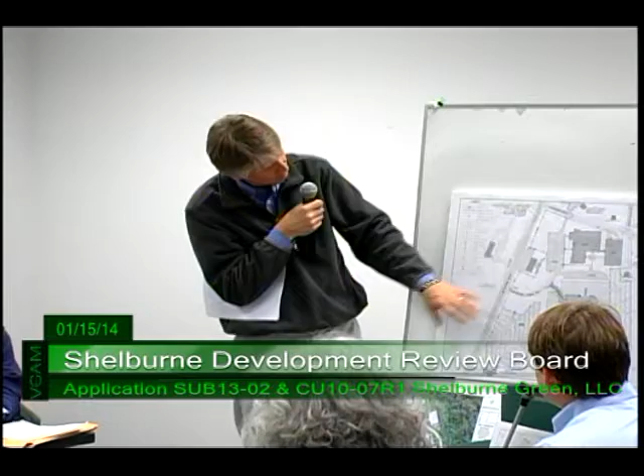This proposed project occupies the southern portion of the remaining undeveloped portions of the property. This plan identifies the open space components that encircle the proposed development area. Currently, there's an existing driveway that services the site and is intended to provide the primary means of access for this new project, part of the newly widened portion of Route 7 in front of the Shelburne Vineyard and the Folino's and Fiddlehead building.

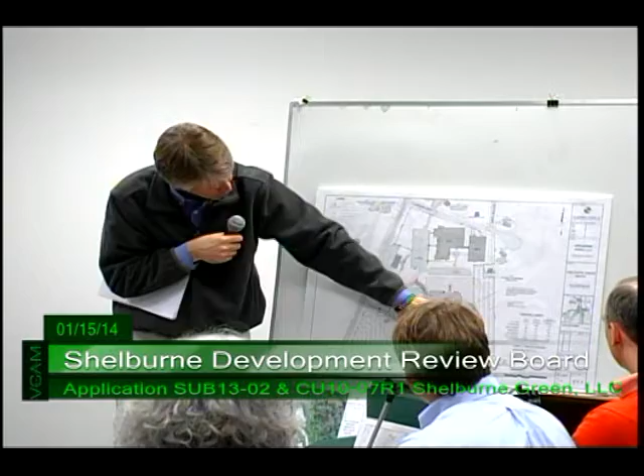That being the surrounding area, this project proposes a master plan approach with a number of relatively small sized commercial buildings as a means of breaking up what otherwise would be the mass of a large structure. The intent is to create incubator space for small businesses, and the underlying plan of how that would play out is shown here on this site plan.

This zooms in on the southern half of the property, showing the existing access drive, existing parking, and the existing structure. As you move south, there would be a U-shaped type of access supporting the parking and a turnaround allowing circulation in and back out, with a series of small buildings working around the horseshoe shape in support of the project's goals.

As far as setbacks, this is proposed as a planned unit development, which means it's obligated to provide at a bare minimum 100 feet of green space around the perimeter, and whenever a project abuts a residential use, that gets boosted up to 150 feet.

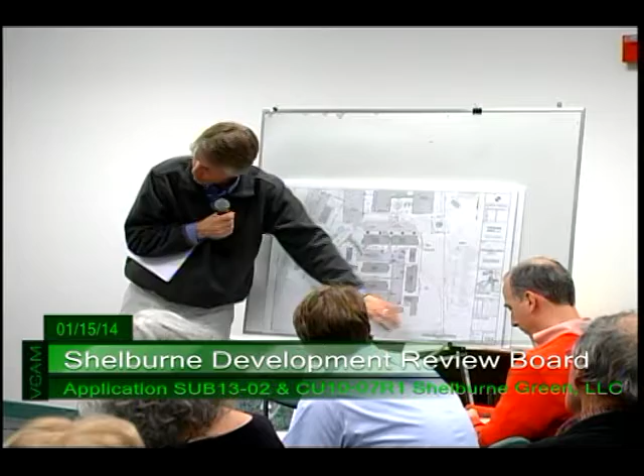So out of that, there had been previous discussions with the Gables regarding supplementing this particular portion of the field with new landscaping that has been in place. During the sketch plan hearing, there was some discussion about pedestrian access through this particular corner of the property, and since then the fence has been extended to try to seal off this area, at least what is controlled by the applicant.

But in regards to this particular preliminary plat application, I must apologize.

We've basically added flesh to the bone regarding the detailing of the utilities and the site grading, and with that have also identified in more detail the presence of a Class 2 wetland that occupies the southwesterly corner of the site. That has been site-walked with the State of Vermont Wetland Division, and an application will be required to be submitted to them in support of the activities that fall within the 50-foot buffer.

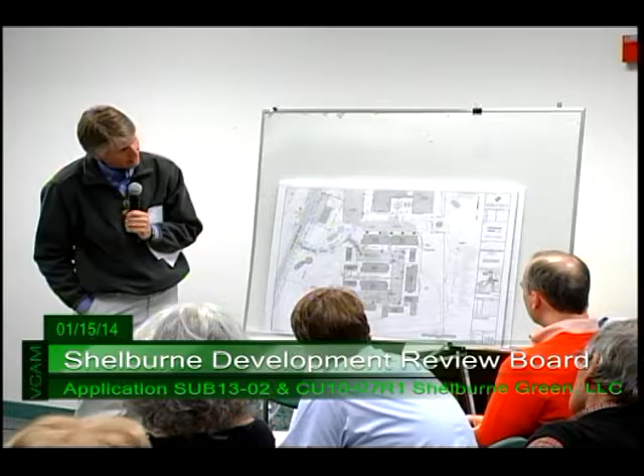Otherwise, we have received water and sewer allocation from the town to support the project, and we have met with a number of department heads. The water department unfortunately had some water main breaks that precluded them from being able to prepare their staff report, but nonetheless there are a couple of small recommendations that they've made that we are very happy to implement into the design plan.

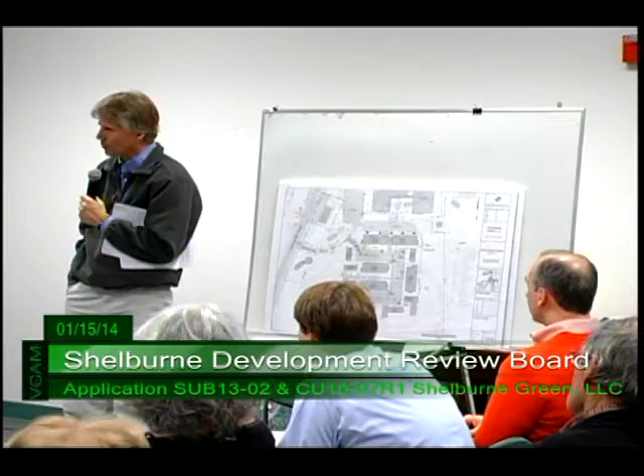So I guess at this point, perhaps we should spend a little bit of time. Now I'll let Graham Goldsmith come up and talk a little bit about the concepts for the buildings, and out of all that, start to round out the ideas for the landscaping. Then we can go back into the staff report and discuss those particular items which have been identified as worthy of additional discussion to help bring some closure on those issues.

Thank you. Graham Goldsmith Jr., one of the developers of this project. Just wanted to tell you a little bit more about our thoughts here. We've enjoyed a lot of success with the initial phase of the project here. We've had some really great tenants move in, some interesting companies, and a great mix of people in there.

What we were trying to do at one point was to create some incubator space for smaller companies to come in. We were talking with a lot of food producers and smaller kind of agricultural value-added products, but also other types of products. So in keeping with that, we really felt the southern portion of the property, as Dave said, was a great location.

We felt there were kind of some big monoliths with the Teddy Bear Factory - they're a great big warehouse - and our building is a larger structure as well. So the idea was to break up that kind of series of buildings into smaller buildings.

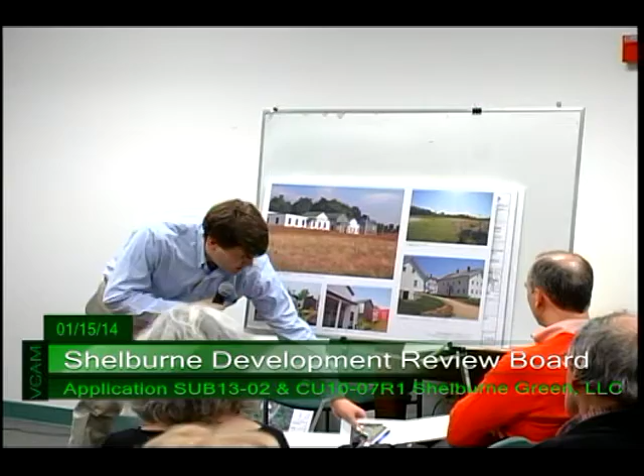But really the idea with the site plan is we've got all of the services and the parking in the middle of the development, so really the parking and cars won't be very visible from the road - you'd really just see the buildings. We're looking at doing gravel driveways and parking as well to reduce the impervious surfaces.

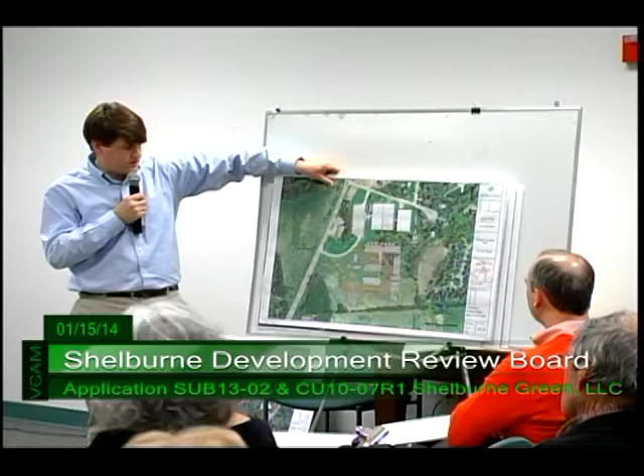The idea with this too is to try to find a way to build these at a reasonable price so that we can have some lower rents, to have some newer companies come in as well. It would be open to office users as well.

For the conditional use, what we're looking for is really just what we have here in the building already. It would include enclosed light manufacturing and warehousing, which is consistent with the neighborhood - you have the Teddy Bear Factory that does that. This building, we've had essentially that use since the 1960s, but office has been a great addition.

So an aggregate of 70,000 feet in total. The buildings range from about 9,000 feet to 2,200.

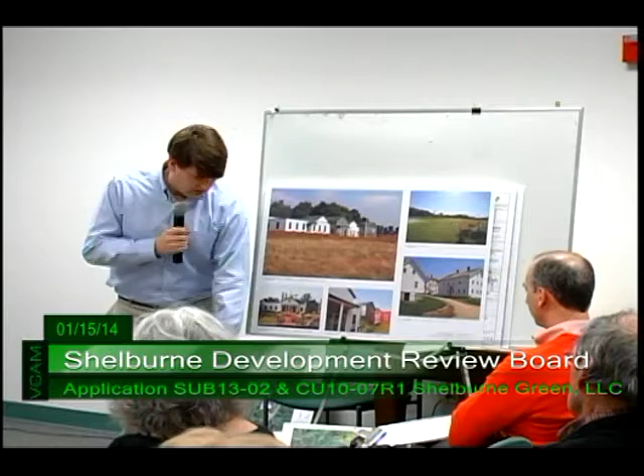What's the aggregate square footage you're adding again? 70,000 feet in total. I think we have proposed 151 parking spaces. And really also we were the ones that did the lane widening on Route 7. So a lot of that infrastructure we invested in there was keeping in mind that we might want to do something down the road in the southern portion of the property.

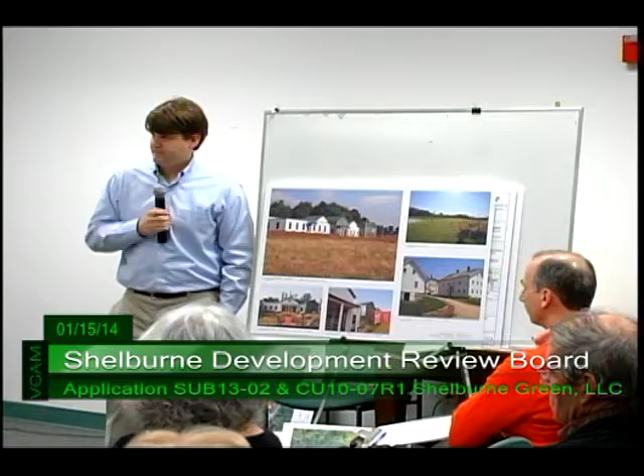Since it's gonna be gravel parking and driveways, what kind of curbing are you gonna use to keep the gravel where it's supposed to stay? I don't think any curbing at this point. Anything to mark the actual parking spaces? So there won't be striping, obviously. No striping, just at this point. Okay, so just gravel and park where it's logical. That's what we're thinking for now.

Could you just give me a rough idea how this has changed? Any of the changes you've made since we last saw this? Have you changed anything with features like?

Dave Marshall: The primary change is a tip of the hat in regards to the formal delineation of the wetlands. We found that those were larger than what had originally been anticipated, so we consolidated the structures in the southwest corner of the project site. Otherwise, as Andy indicated, it is very similar to the sketch plan application that had been submitted previously.

Dave, the Natural Resources Committee raised some concerns about open space, which I'll think of as a congregation space maybe for employees, if you incorporate anything like that. They also mentioned whether we've done a good job of landscaping for the visibility coming up Route 7 and seeing this project. And impervious surfaces - is there anything that will prohibit you from paving a lot of this parking area down the road? Because if you were to pave that in the future, it is an awful lot of impervious surface.

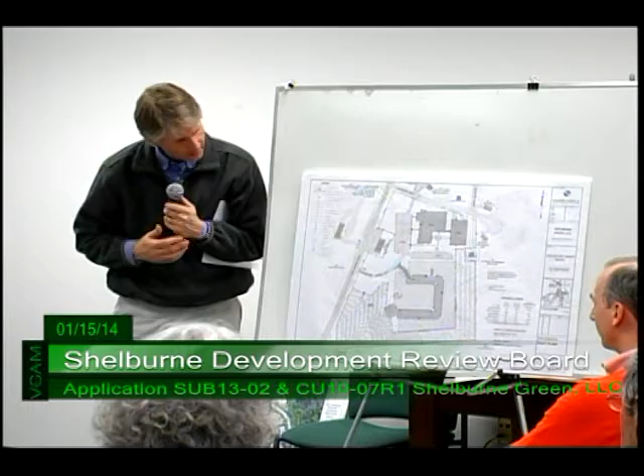And very quickly in regards to landscaping, as far as vehicles approaching Shelburne, coming from the south heading north, one thing that's very nice about the project site is that there is a ledge outcrop right in this corner, and it basically provides a mature growth of vegetation. The farmer never got in there to hay that area, and it's grown up pretty significantly, creating a very nice visual screening as you're moving north in regards to what is happening in this particular corner of the site. Under the previous project, there were trees planted along Shelburne Greenway. They are small at this point, but they will grow in time, at least that's what we're told. So in regards to creating a character and an access focus point, those have been the goals so far in regards to landscaping, but more importantly, preserving that particular area as part of that gateway preservation component.

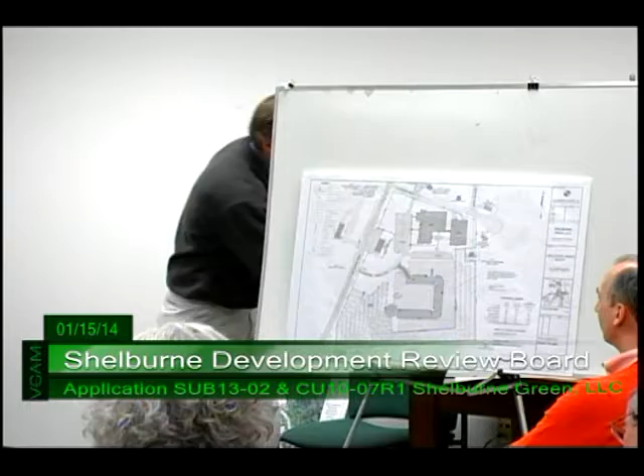Have you thought about an employee congregation area, like picnic tables somewhere, or anything that could satisfy that? Yeah, we have a couple different areas. As part of the original project, we have a great outdoor area - in the warmer months we've got a nice water feature with a little waterfall right here. We have lots of tables and chairs, and picnic tables over in this area. One thing we like a lot and we're going to try to preserve as much as we can - we've got a great grove of maple trees here, and there's a really great tree in there too that maybe we could add some benches to. We also have a walking path that goes around the perimeter of the property, so at lunchtime some people like to walk around the perimeter.

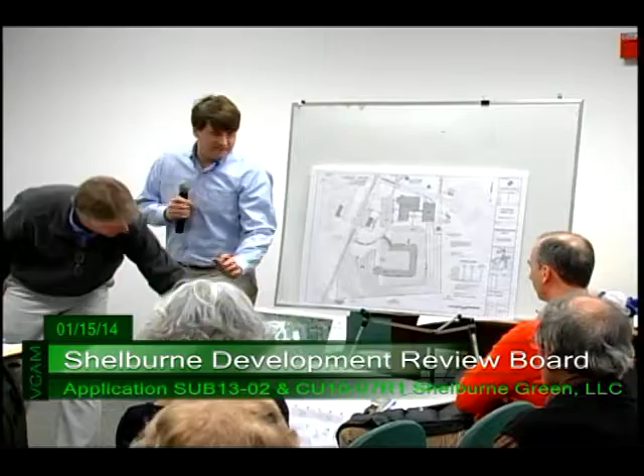Due to some of the wetland constraints, we've narrowed this a little bit, but we wanted to have a nice square in the middle, a little bit of a quad feel between the buildings that's set back from the road. One of the design elements too is to try to keep the buildings blocking some of the parking and dumpsters, just having that nice rolling field. We're set quite a bit back from the road as well.

So on that note, you mentioned the trash receptacles. I do notice you've got a little bit of landscaping around those, but the parking area itself really doesn't have much in the way of landscaping except for one existing tree. Is there a reason why you may not have incorporated more trees or anything else into the parking area?

Some of it is really the shaker style village, the design philosophy is kind of the simplistic approach. However, we are planning on doing some plantings in there as well. We want to add, we've had fun kind of adding edible plants in there, Nanking cherries, blueberry bushes, things like that, so absolutely we'll want to continue that over in this area as well.

But it's not shown on your plan. You said you're adding edible, what did you just say? Yeah, we'd like to continue that theme. We've done that over in phase 1 over here. We've got a lot of those plants, but I'm sure we could add some to the plan too.

So, if I may, just so the public also understands, there is a zoning change to correct an issue in regards to historic or pre-existing buildings that happen to fall within the perimeter PUD's 100-foot setback. Right now, the current rules would say if you want to do a planned unit development in this particular district, you'd have to tear down the existing building to make it happen. So the Planning Commission has processed that request to modify that and make it consistent with other planned unit development capabilities to allow existing buildings to be retained. Nonetheless, for that to work through the process, where it first comes out of the Planning Commission, then goes to the Select Board, then through hearings, and then through yet another waiting period, that all at best won't come through until March 5th.

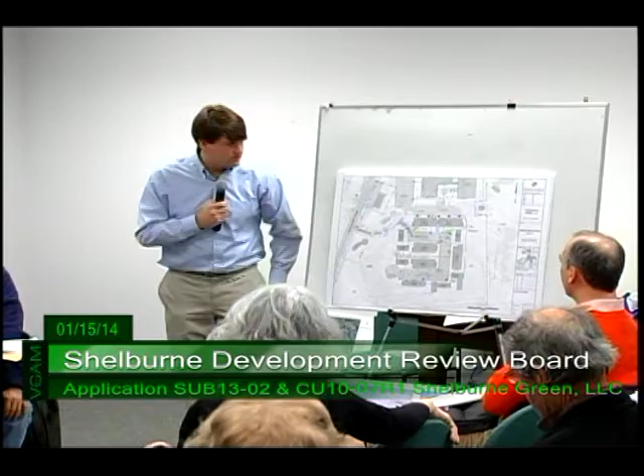We did, after the last meeting, add this path here, kind of around, which does help, but doesn't quite commingle. I just don't see people making that journey from one side all the way around there if there was a need to utilize some of that parking on the north side of building number 1 and 5, I think.

Yeah, absolutely. I mean, I think the thought would be possibly to add entrances for these two buildings as well, which is about 17,000 feet too. So that really could absorb or use up the existing parking.

If I may, I'll add one more point to that. One thing we heard before at the sketch plan level was that there was concern regarding how people were utilizing this particular private road, not controlled by this property owner but by a third property owner, for accessing Green Hills Drive, using that as a cut-through whenever the queuing areas at Route 7 and Marset were challenged. That being the case, one thing we're trying to do here is focus these movements to Route 7 and not create an easy way for people to even think about utilizing this intersection. The goal is to basically bring everybody out here. That's why the Route 7 widening was done, to provide that center lane for turning movements, because all of that future traffic was going to be coming out at what we call the south driveway. So that goes back a little bit towards why this is shaped and set up the way it is, so that we are creating some discontinuity from the residential neighborhoods to the north and to the east.

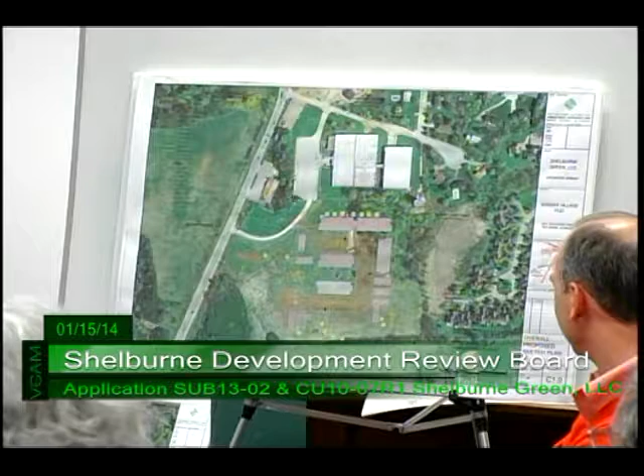We are concerned, especially listening to all of the comments about buffering around all the other sides of the development, that perhaps more could be done there, similar to what was done in agreement with the Teddy Bear Company a number of years ago, where there were actually berms built up and a variety of appropriate trees. This could also help, because this is going to possibly have a good-sized impact on at least the units of the Gables down at the far dead end of Covington Lane. So we would like to have that considered also.

We were wondering, because I've read through the report from town staff - I don't pretend to understand every piece, but we saw something suggesting there was a vague possibility, maybe not an expectation. Could there be a restaurant in any of the new buildings? And if so, would there be deliveries coming into any of the buildings at night, other than normal daytime business hours, that would allow headlights to shine back?

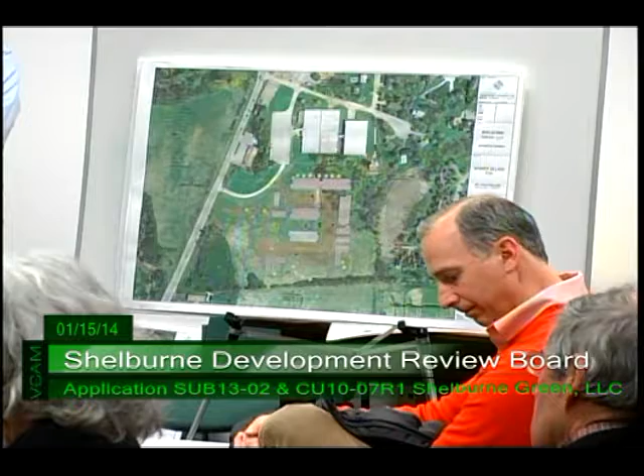I can see that might not be as much of a problem because of the way they're situated. Indeed, though, if a restaurant was allowed, it might be open later - more vehicular traffic, possibly more noise, more lights, more aromas, good or bad. And if this ended up being a use, what could or would be done to block that sort of pollution from the Gables, which are relatively close in that area?

I do want to note that during the October DRB meeting, the application submitted by Shelburne Green Business Park included several specifications we requested and hope would not be changed - including that the new buildings would be basically one-story, there will not be loading docks or vehicular access on the eastern side, and as much of the external lighting as possible will be wall pack type to minimize any lighting pollution toward that direction or other residences.

I'm going to give that back to you. Thanks. You're welcome.

Just to address a few of those, I'll try to go in the order you did. In terms of buffering, when we did phase one, we weren't quite there yet. The idea was, if you guys are doing something down the road, we'd love to see the trees be a little more mature and have a fence there too, to help keep people from walking through and disrupting things.

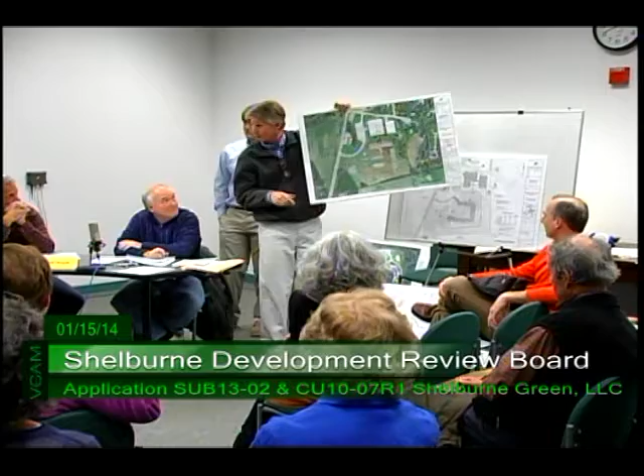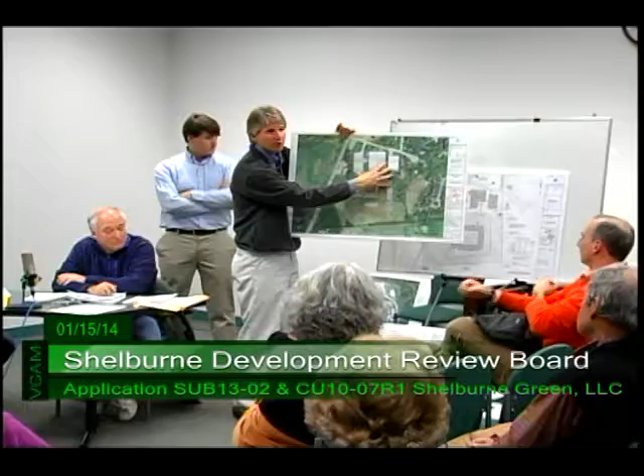So, for the public, right now a planned unit development is basically where you take concepts and consolidate them, and in this particular case the zoning regulations require that you create green space around the perimeter of the property to achieve certain goals as far as buffering surrounding uses from a concentrated use in the middle. The regulations right now say that if we wanted to create a planned unit development, you're not allowed to have any buildings within 100 feet of the property line. So, unfortunately, these are existing buildings that have been here since the 60s, and it seemed quite frustrating that in order to create a nice consolidated development in the southern portion of the property, we couldn't use that tool because of this particular requirement.

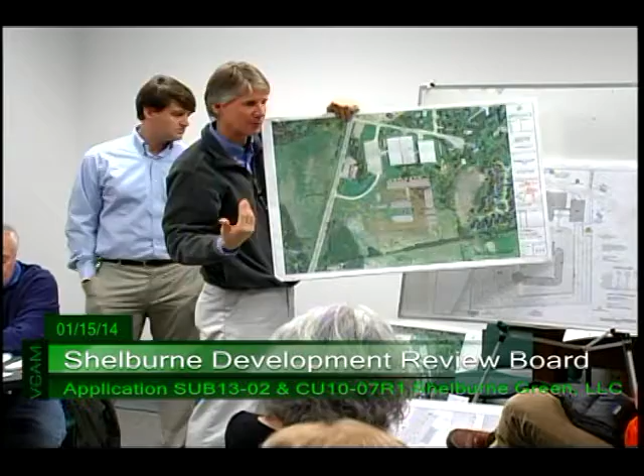Now, the town in the past, for residential projects that had existing buildings within the perimeter, pre-existing buildings, changed the rules and said it doesn't make sense to tear down an existing building—it's always been there, everybody understands what the uses are. As such, what this particular zoning change proposes is basically to allow existing buildings to stay when you create a planned unit development for the entire property. So that allows this to now be looked at in a more consolidated way, using some of the planning tools allowed within the planned unit development component of the regulations. So that's the zoning change.

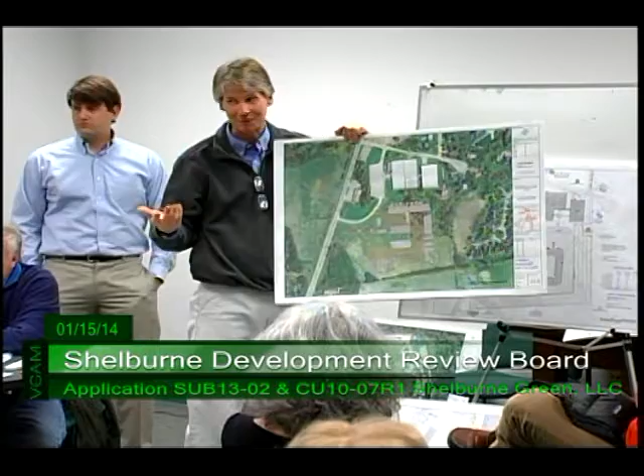Now, the other component, which was adopted in the past recently, talks about how some other accessory uses can occur within certain zoning districts in town. And that's the one that's in place. The definition of accessory is in the zoning regulations. Obviously, when you talk about accessory, I think that's why we have the board—to help arbitrate just what is accessory and what isn't, in regards to compliance with any proposal that comes before the board for those particular types of uses.

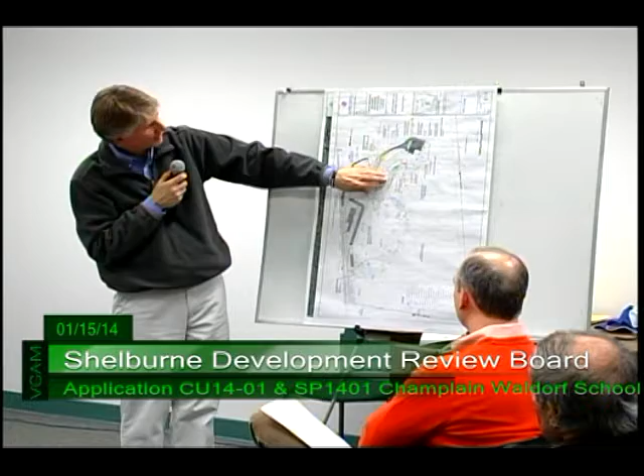Also, because of a change in the regulations, these particular types of public spaces now have to be sprinkled. So this project will take the existing 8-inch water main that services the south end of the building and extend it along the west side access road, bringing that to the sprinkler service for the new multi-use room.

That being the case, things we heard about last time were the challenge of organized parking area. One of the challenges of a gravel parking lot is, unlike a nice paved lot with parking spaces painted out, you typically don't have that on a gravel surface.

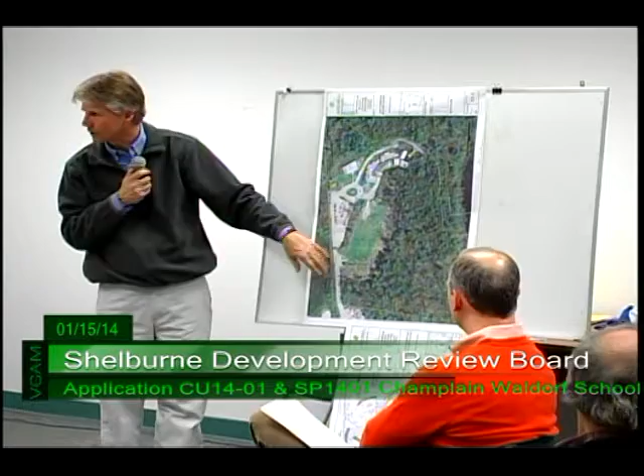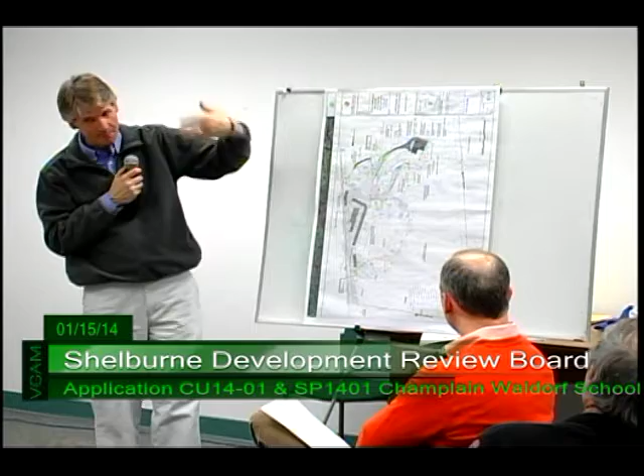So what we've proposed in this case is a little outside of the box thinking, but something we think is one way to proceed. One thing we benefit from here in this part of Vermont is different sources of crushed stone material of different colors. Shelburne is known for the Shelburne limestone, hence the white color that's the predominant, or only, material on site today.

However, immediately to our south, down in Ferrisburg and New Haven, there's a black shale type material that creates a nice contrast between the two. What we're looking to do is shave off a portion of the existing white stone and place the black material in places where designated parking is.

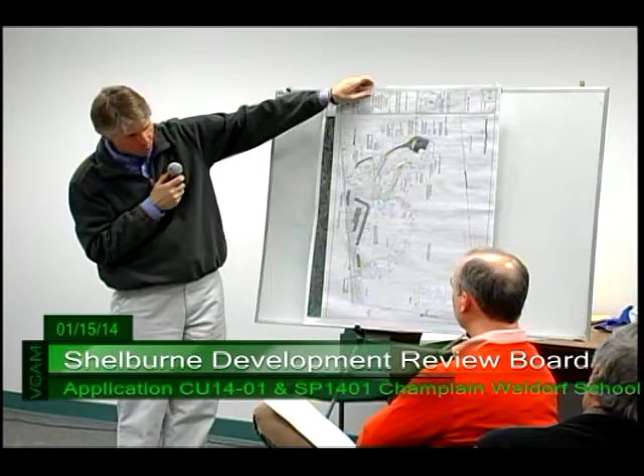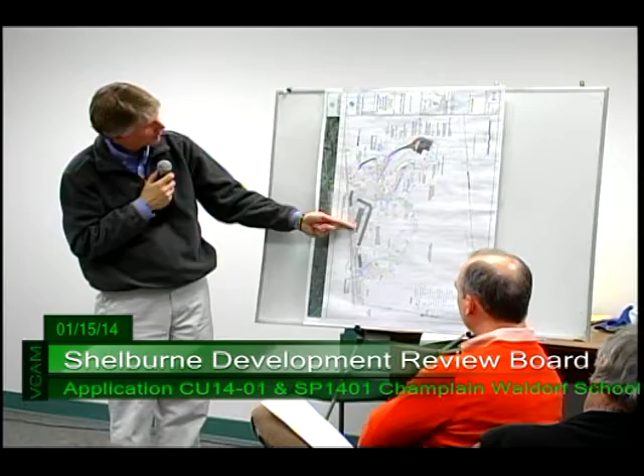More specifically, what we were hearing was that we wanted to make sure there were adequate width means for emergency access vehicles to gain access to the building. At this point, this program would basically tell all staff and parents that if you're coming to park here, park on the dark material.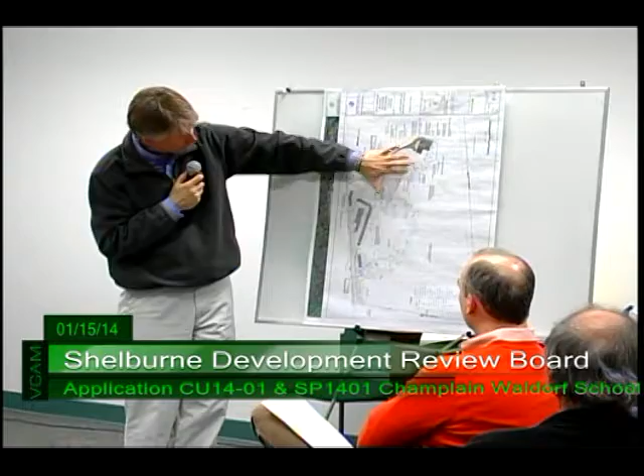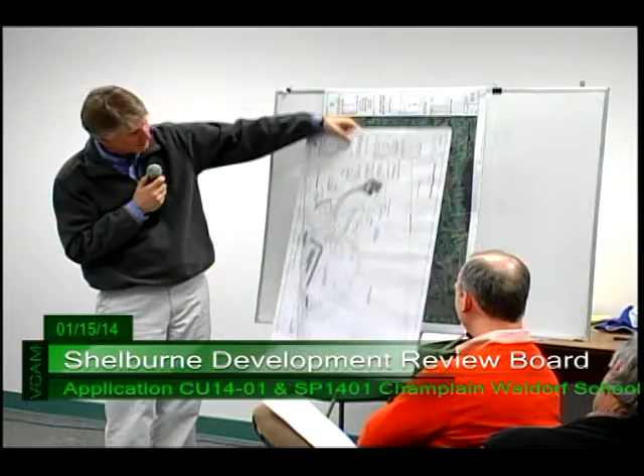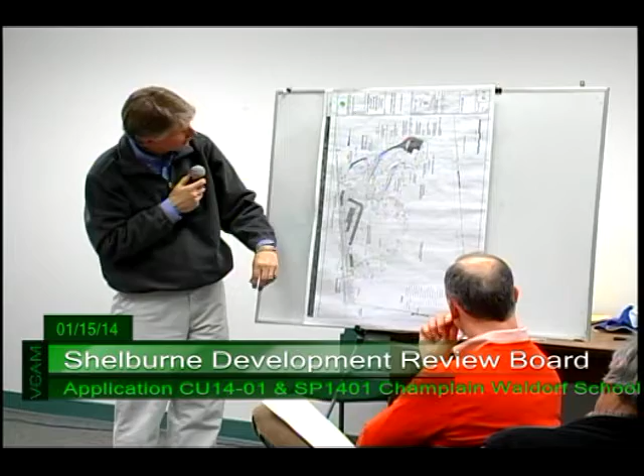One thing not shown here is a sign that would support that approach, but one thing about at least the private school, or any school, is that if you can get the parents to read the newsletters that go home, that's how we educate them on how this particular site is utilized. So that's one of the things we're looking to do to deal with site circulation concerns, but more importantly, emergency access to facilitate ready access on both sides of the building in support of the proposed expansion at the far north end.

I think we're open to questions.

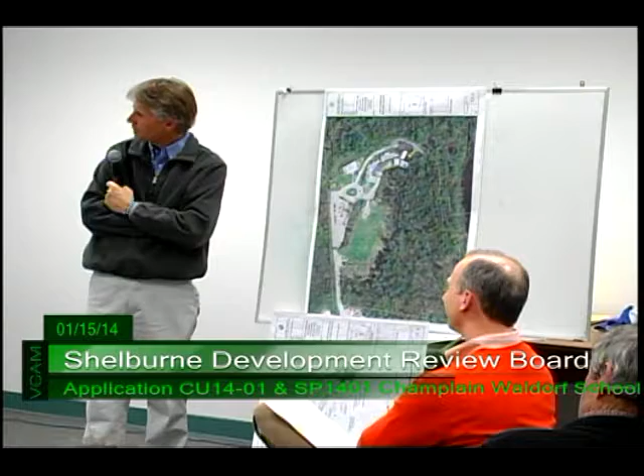How are you going to keep the two different color tones separated? You will definitely get contamination over time. So it's going to be a maintenance obligation to go back and freshen that up. Yes, absolutely.

Any other questions from the board at this point? It's noted in the staff report, and I had a conversation with Rick Lewis, head of the water department. He had a concern about the water line, the size of it. Have you spoken with him? Well, at this point, Rick was more concerned about making sure that the water main, as extended out on the west side of the building, has flushing capabilities. So one thing we're adding to the plan is either a hydrant or a blow-off at the very end to enable this line to be properly maintained and flushed annually. That was the primary recommendation from Rick's office, but we have no issue with compliance with that.

Are there hydrants out there? Trying to think on the town portion of Turtle Lane, I believe there are hydrants through there. But I'm hard pressed to answer whether there's anything on the parcel here. Probably wouldn't hurt to have.

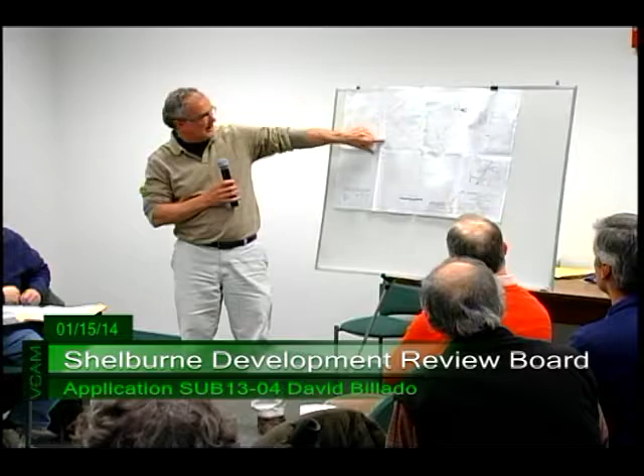This lot has access off Chesapeake Drive, this one off Webster Road. They both are served by, or will be served by, municipal water and sewer. We think this is a pretty straightforward project. So I'll leave it at that, and if there are any questions from the board or the public, I'd be happy to entertain them.

Questions from the board? I'll start with one. You're still talking about a curb cut somewhere on Chesapeake Drive? Yes. Do you have a rough idea where in relation to that curve you'd want to put it, Gunner? I think it would be off the curb back in about here somewhere. Again, once we do the site-specific mapping, we'll detail that and show specifically where that would be.

And utilities, you plan to take those off Chesapeake Drive? Off Chesapeake and off Webster both. Again, both of these - this is very flat off the road onto the site, and this is sloping over here, but it's also flat from the road in. So it's very easy to develop these spots.

Any other questions from the board? I've got a question for Annie. Annie, as this is a residential district, what if we were to find that we didn't have enough buildable area here that we were comfortable with, zoning-wise - what mechanism would come into play? I mean, the buildable area, as we discussed at the sketch plan, doesn't come into play except in the rural district for the straight subdivision.

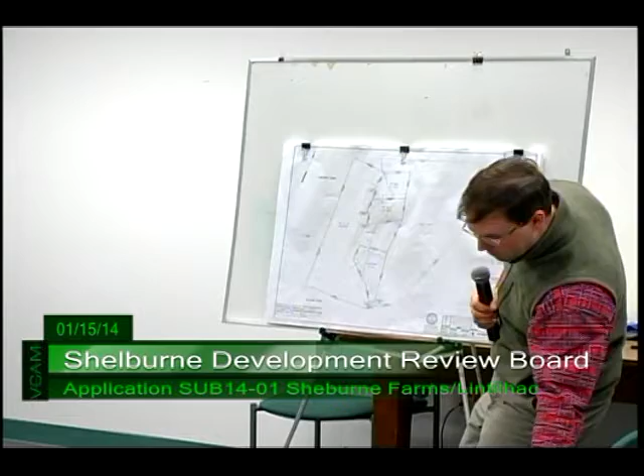During that time, Shelburne Farms actually hired a land use planning firm by the name of Matlock and Associates, and they created a plan, which I think you guys have copies of. That basically laid out the proposed lots, along with view corridors and roadways to access those parcels.

Sorry, you don't have that? To the board, okay, just to. So I've got 4 copies. And I actually have a large scale here.

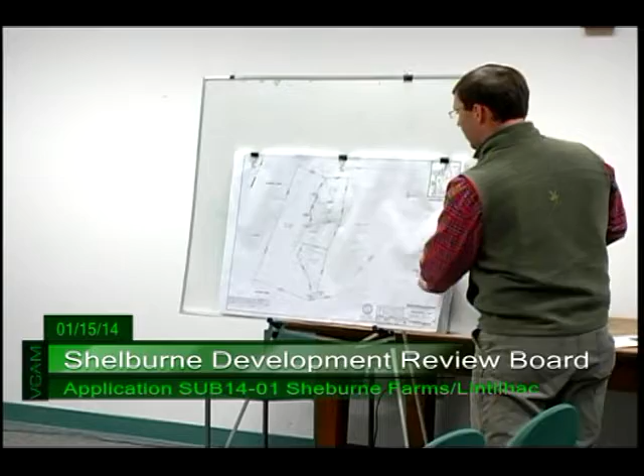So when Shelburne Farms actually marketed these parcels as long-term lease lots, this document was actually part of that legal agreement, showing the roadway access to serve these properties.

Recently, Shelburne Farms—back up a little bit—RL5 was developed as a single-family residence. That's currently a single-family residence, and the access to that lot utilizes the existing agricultural road. The road goes through the main developable portion of RL4, as currently shown in the original survey plat, which is different than the Matlock plan.

As part of this proposal—in 1986, I don't think the PUD requirements were as stringent as they are currently, and it probably allowed for some flexibility in the roadway. Under the new zoning bylaws, once the PUD is approved, the road must be constructed in accordance with the roadway location, and because the Matlock plan was not actually part of that application, we're basically re-requesting approval of that route.

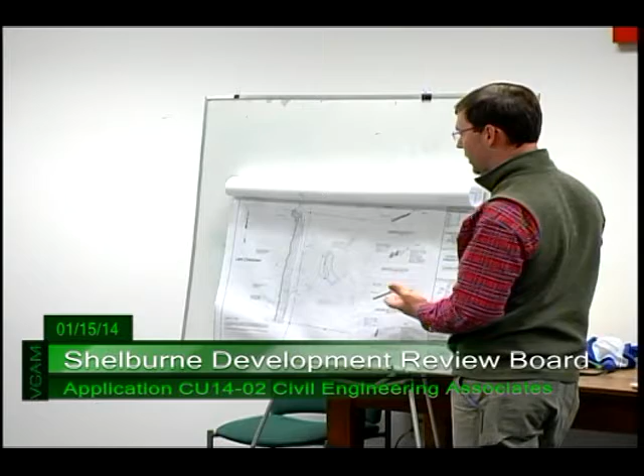And also what we've done for the town of Shelburne, basically involves larger riprap. The work's done above the 98-foot contour. We basically excavate out a keyway. The larger stones are stacked up to an elevation that's above what we foresee as the high water, and also above what we saw during the high water from several years ago with the wave action. We've done a bunch of these designs around the town of Shelburne and also in adjacent municipalities. They've held up very well, and they've really reduced the amount of erosion.

As part of this permit, our office has also talked to the Army Corps. Some of the rocks were actually pulled out into the water, and we are submitting a permit from the Army Corps. It's very simple and straightforward, but it will allow us—we cannot place any material, we cannot disturb below 98—but we can remove the rocks that have been pulled out from this location. That's a self-verification permit, a one-page document, so we will issue that, and we have already contacted the Army Corps. Our hope is to obviously use all of the rocks that are out there.

The larger ones we'll use for the wall itself, and the smaller ones we'll use for riprap behind the wall. Pretty simple set of stairs on the north side of the property, 4 feet wide in accordance with the town specs. And that's an overview of the project.

I don't know if you guys have questions, or if Gail wants to speak.

How long is this wall, Chris? The frontage is 300 feet, so it's pretty much that entire frontage, so 300 feet. It's probably stopped short a couple feet on the north side. There's actually an existing large boulder that abuts the north property line that we're actually able to key into, which will work out very well.

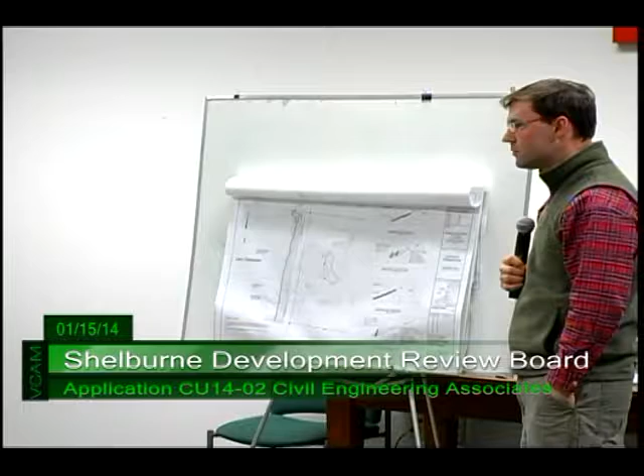You say both abutting properties have the same wall? The abutting properties on this do not. I think Cooper's is 2 south, is it, Andy? I wasn't here for that one. Okay, I think 2 south, and then as you go north along Shelburne Bay, there's got to be six of them. And even when you hit the South Burlington line, we've done a bunch in South Burlington also. So that was my question—how are you going to terminate these or knit them into the adjacent property? Well, all work will be done on this property, so we'll not be doing any work on the adjacent properties.

On the north side of the property, we'll butt the rocks up to that large boulder, so it'll provide a solid interface there. On the south side, we'll extend it down to the property line, and then we normally just key that back into the bank, so it'll be that natural transition—similar to what we've done on pretty much all of the projects, unless the neighbors show an interest where we can key the two walls together, which we've done to the north.

You're talking keying back in—are you angling it back on the south? Yeah, what they'll do is turn one rock and tie it back into the bank. Like I said, they're all natural rocks, so it's not like a concrete wall. They basically fit the rocks, and the contractors—the work that we've seen has been phenomenal.

In this instance, the stone's a little bit lighter than some of the other walls we've done, but the contractor will be trying to match that stone as close as possible with any stones we bring in. Obviously each quarry is a little different, and each vein in each quarry is a little different, but we'll certainly make sure the contractor tries to match that as close as possible.

So what color are these? I mean, you've done some before where they're like a light brown, or— Yeah, light blue, we've done them all over. A lot of the walls we've done have actually come from the Whitcomb quarry, which is almost more like a reddish brown.